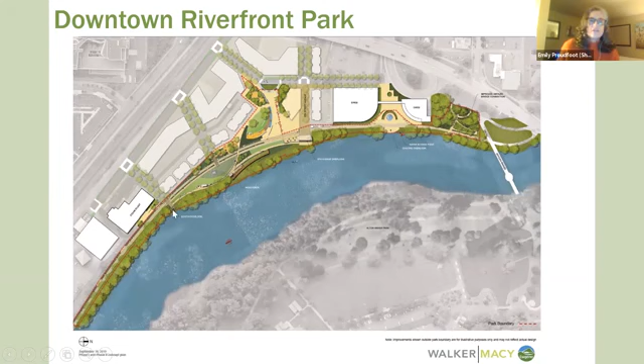A little bit of history about the downtown riverfront: the park and riverfront redevelopment has been envisioned for decades in many downtown plans and iterations of visions for a future of downtown where we come back to the river. It was the site of a former EWEB operations.

EWEB's operations moved west to the Roosevelt Operations Center around 2010. At that time, a master plan was developed for this site that envisioned a park and mixed use development, including retail and restaurants and lots of green space.

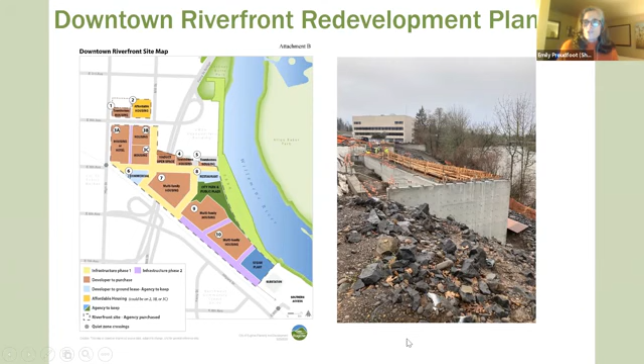In 2019, early 2019, all of the buildings were razed off the site. Then we embarked upon a huge earth moving project in which we moved the top of the bank back, relocated utilities, and graded the site so it would be ready for roads and utilities.

In 2021, over the summer, we almost completed the project. This is a picture probably in the fall, before we seeded this lawn area and before we'd had a chance to fully plant the riverbank.

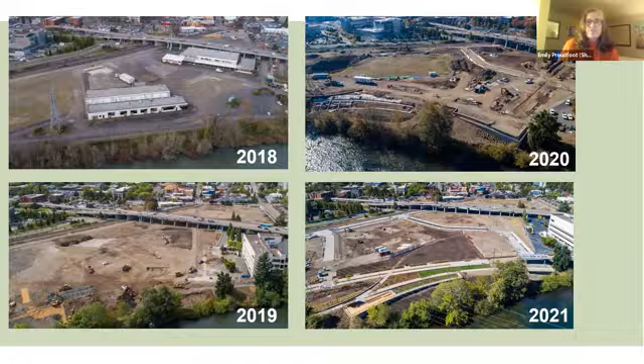But now there's a lot more green on the site, but you can see this deck overlook here, the 5th Avenue overlook, and it's really starting to take shape. It's a very quick progression over a relatively short period of time, and an extraordinary amount of work, because we were actually planning for a park on the riverfront by 2021 in time for the World Games. So a pandemic is never a good thing, but a year-long delay of a project like this can be very helpful. So with that, we are very close to realizing this vision.

We had some ideas about that from the master plan, which was that we want the river to meet the city and the city to meet the river. So lots of vegetation and stormwater, but fundamentally folks wanted an urban riverfront park. They didn't want it so urban that it was like marble and trees in front of glass buildings, but they also didn't want it so fuzzy that it looked like a lot of our other riverfront parks in town that are predominantly green and natural and shady. They really wanted this to have more of an urban feel, with the city coming toward the river a little more, while also enhancing the habitat and quality of life on the river for birds and fish. So there's a lot of these conservation ethics that were also expressed throughout the design process.

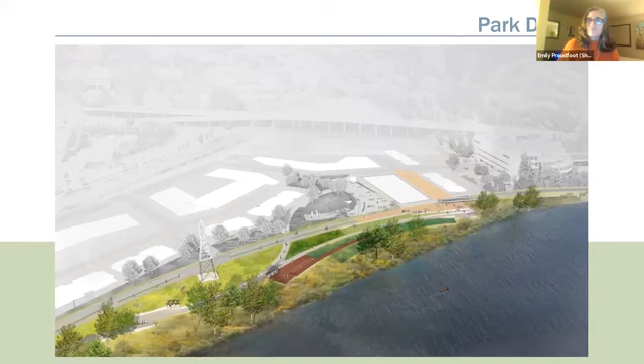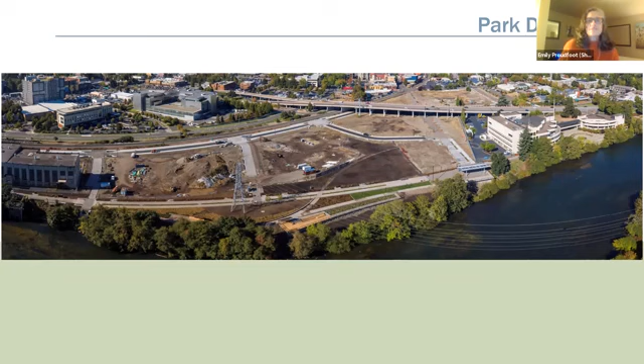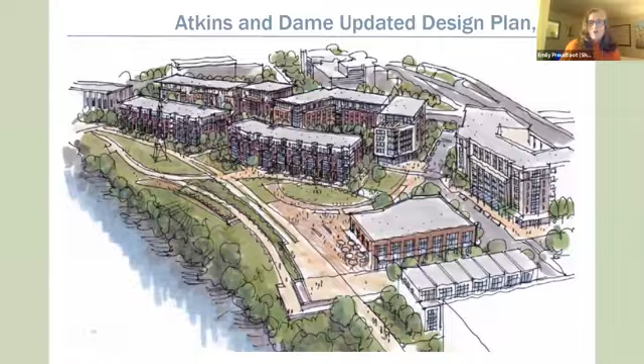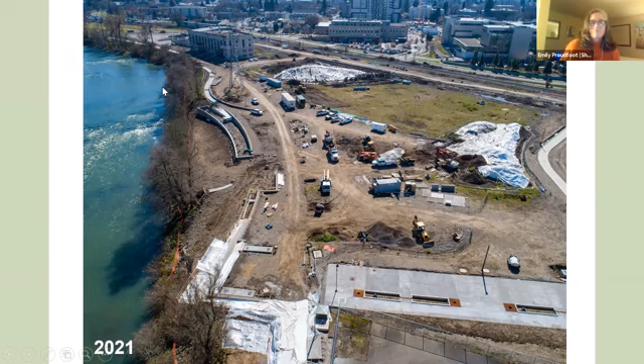One of the key design tenets within both the master plan and subsequently the park plan was this idea of a cultural landscape. A cultural landscape basically lets you know where you are in a place because it tells stories about its history. It creates experiences that are either historic or real or current, and they do that through plantings, art, design, and storytelling. That was really a vision from the beginning for this site, as there's been a lot of history on the Downtown Riverfront site.

So we have three different art installations that are going to be integrated into the site. The first is this steam ring here, and it interprets the steam plant, meant to be a cut-through of a turbine. The way the steam plant worked is it pulled water up out of the river, and then they boiled it using a variety of different fuels, everything from hog fuel or sawdust from our timber industry to, I think in the end, natural gas. That created steam to heat downtown. The steam plant was also a backup power generation site in case something went wrong with our regular power generation sources.

And so this artwork is really interesting. The outside ring is a grate, and the inside ring has all the parts and pieces of the steam plant labeled. The outside ring has a little bathtub under it, and inside of there is light and mist that will come out of the grate.

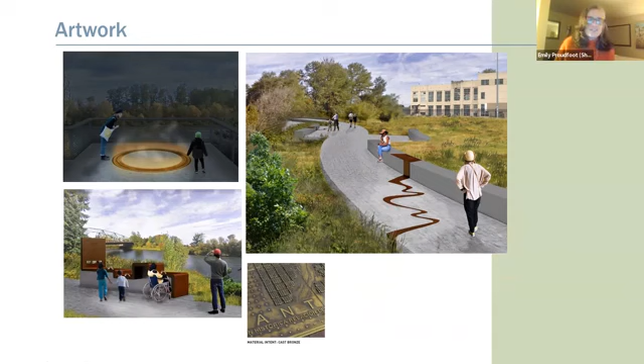In the meantime, we're finishing up a lot of tiny details that I think will make it really successful once it opens. Here are some samples of the bronze artwork—you can see this grate and these words on the inside. These are samples of the interpretive panels that come up off of the river piece.

The sort of iconic piece of art on this site—we had a lot of conversations with the community about artwork, and our project artist, who was on the design team, taught people about public art and then asked what kind of art they'd like to see on their Downtown Riverfront Park. One was iconic, really big art, and the other was interpretive art. I think we've covered a lot of those bases.

This piece is called Sub Supra, made of about 60 fabricated metal ribbons. The underside is stainless steel, and it takes the shape of the topography of the river immediately below it, so you can see the river channel here. It's very reflective, like the bean in Chicago—you can see yourself reflected in it, and it's bendy, so you can be short or tall. But I think one of the most beautiful things is that you can see the reflection of the river running along this edge when you visit the site.

So it's this beautiful gateway out to this wonderful overlook to the river, which is very expansive. It will be lit, and it's also meant to be a space for more artistic encounters—maybe sculpture, or a band playing, or a screen pulled down for visual art. It's really an icon of the place we've created here, and it's absolutely beautiful.

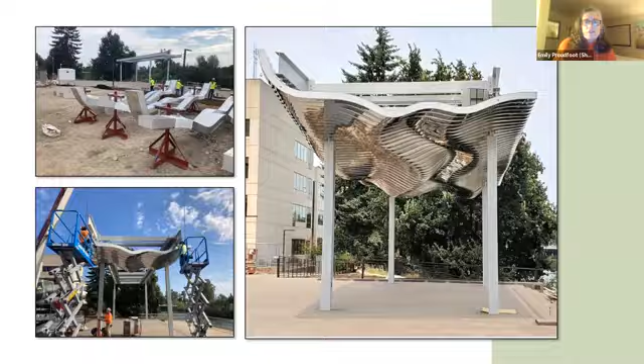This third piece is a temporary piece, and I love this piece. We have so much chain link fence on site that we wanted to put out the option for decorating the fence in some way. So we did a call to artists, and the successful artist was Charlie Swing from Art City, who reached out to communities of color and culture to see if they wanted to do some kind of culture raising on the fence.

The only group she heard from was a local indigenous group, this girl TJ, who's 17. She took photographs of an elder and a younger person and put them together as a single face across 100 feet of fence—these oversized faces of local Native Americans. It feels like they're keeping the park safe, looking over the river, and it's wonderful to have that cultural presence within our park setting, to have these folks seen within an art setting. It's a beautiful piece, and I'm very excited to open it with the park.

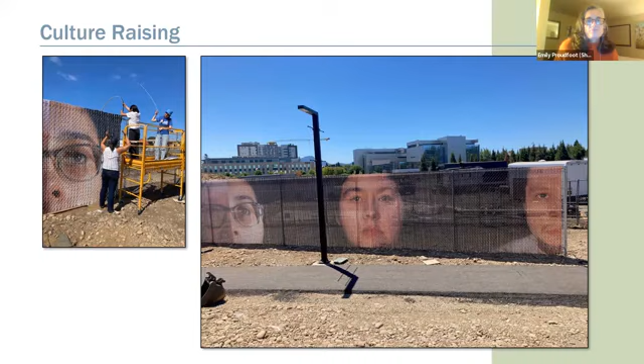We approached planting for this site in two general phases. In the first phase, when we moved all this dirt around, we also did significant habitat enhancement along the riverbanks that weren't going to be changed in grade. We removed a ton of non-native invasives—blackberries, non-native shrubs and trees, ivy, and all kinds of bad things. We grubbed those out mostly by hand, with a little spot spraying that was successful, plus some follow-up spot spraying.

Then, two years ago now, we planted over 24,000 native plants along the bank. I wanted to show you this drawing because it shows how these were planted—as tiny little plugs or pots or bulbs or one gallon plants, all native species.

One of the wonderful things that happened was that there were a lot of flowers in there. The very first spring we had columbine, lupine, bleeding heart, fresh new ferns, and all kinds of things—you can see the list here. In general, it's been really successful, I think.

The last thing I wanted to mention is that this line here is the 25-year flood line, so it's fairly high up the bank. In general, we had one planting group with lots of Nootka rose clusters planted within it—that planting group is this one. And then we had a second type of planting up here, the little dots—that was this one.

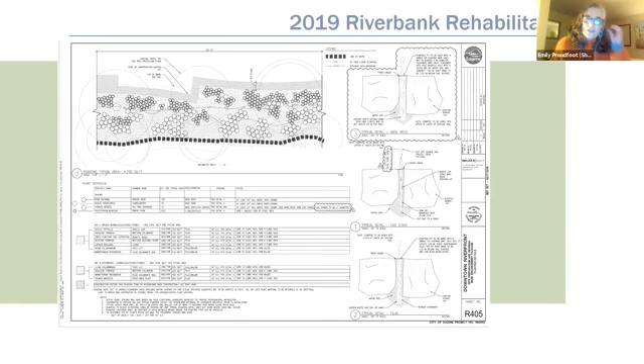So this is a drawing of the future deck and boardwalk and the stormwater treatment planting regimes.

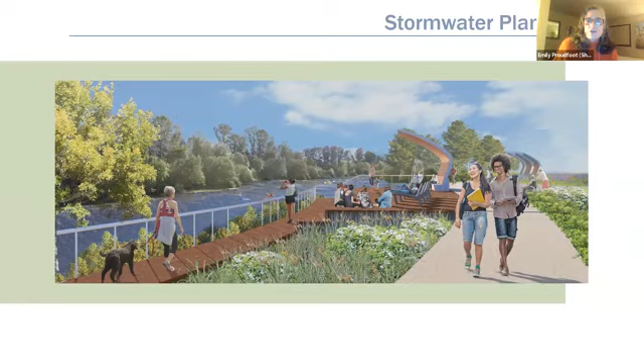As you know, in much of Eugene's development code, any paved areas have stormwater running off that has to be treated through some sort of vegetative facility before it can leave the site. So we have two main areas of stormwater treatment: one is along the bike path where we split pedestrians from bicyclists, and through the middle there's a series of stormwater treatment planters. Those collectively flow into this much larger one, along with drainage from other paved path areas.

This is an excellent example of a blending of plants to create a pattern, and it really has seasonal interest as well. This is a combination of rushes, then yellow twig dogwood, and then Siberian iris.

I think this was planted in late summer, so they were fairly freshly planted, but come springtime it's going to be more full. Over time you'll probably see less of the rocks and more really interesting, diverse vegetation, and in the spring you'll see beautiful flowers.

So it's very effective. This boardwalk runs along the edge of it, and the downhill side is the bank that goes down to the river, and it's been planted all in native plants as well. From a code perspective, for the most part, all of the plants on this site are native or some variant of a native plant.

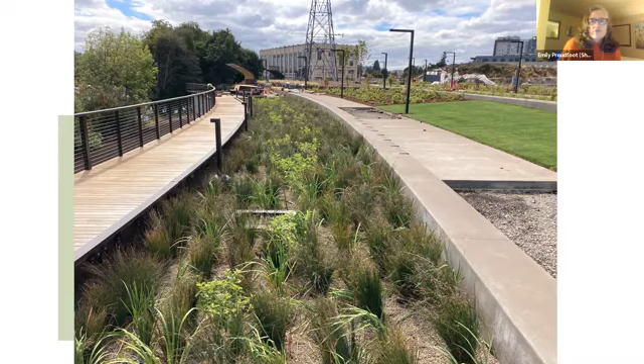So this is a view of what we call deck 2. It's not the main deck, it's a second deck to the south of the main deck. You can really start to see that sort of paintbrush aesthetic that goes through here.

If you look on the plan, this is all Deschampsia, some sort of variety like golden something, I can't remember, but it's very fine and kind of misty. Then in these various bands throughout that planting, there are other plants that get mixed in, and some of them are hiding right now, and some are apparent.

So there's lupin in here, planted around most of these plants in certain areas. There's camas planted all around the back of this section of the planter. You're going to see these things come up seasonally, mostly blue flowers, and they're so pretty. I just can't wait to see this texture and color evolve through the seasons as the project grows into itself.

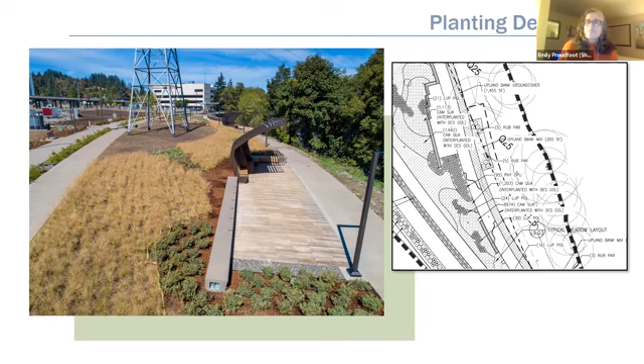This is a view looking south toward the steep planting, that same kind of approach. You can see these shrubs here, and this band marks some of these bands of plantings where they've interspersed other plants—a couple of different kinds of camas, some lupin, all interplanted with each other. When they come up, it'll be really apparent and seasonally interesting.

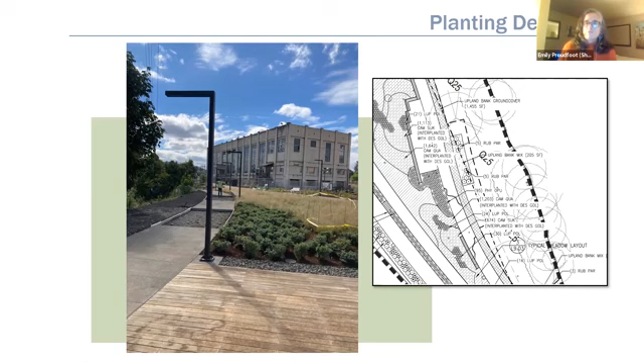This is planting up at the north end of the site. You can see Coburg Road right back here, where you drive up on 4th, and then there's that little on-ramp to the Ferry Street Bridge. This curvy path is all filled up with mixes of ground covers, also lupins, and then accentuated here with vine maple.

In the big picture, we saved some really big trees, big clusters of big leaf maples. These serve as a lovely understory within this new path and ramp system up to the top of the bank, and again it's all within the conservation zone, so these are all native plants or variations thereof.

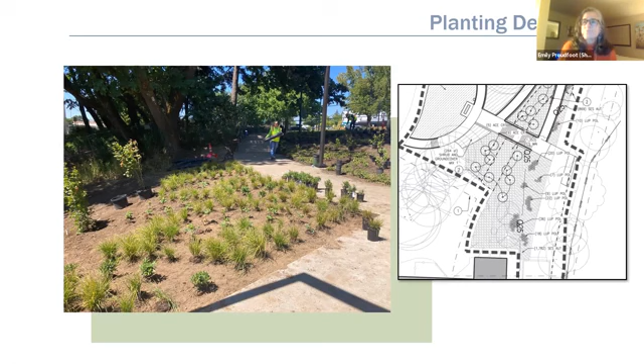So you can see this kind of painting—here's a very smooth grass texture, and here's this kind of rough texture that will have color popping out of it later. Here is the texture of these stormwater planters where there's clethra planted; there's just two things planted in there, a grass and this clethra shrub. Then here's that texture of the stormwater planter with the iris and the yellow twig dogwood.

And then we'll have a sort of fourth texture here, and there's a line that comes across also where there's a different texture of plants down here than up here. Those have all been planted now, they're just very tiny, so it doesn't make quite the strong statement yet that I think it will, but it's all irrigated and mulched, and I think we'll have every opportunity to thrive.

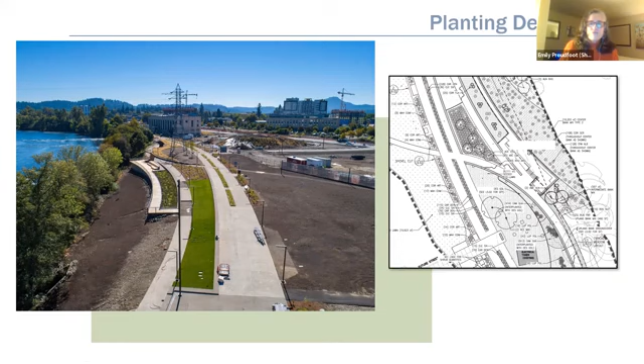So this is maybe a little bit more of the kind of color you might see in the future with these separated landscape areas. I love this drawing because it really shows this two-way bikeway and a pedestrian pathway that parallels the bikeway.

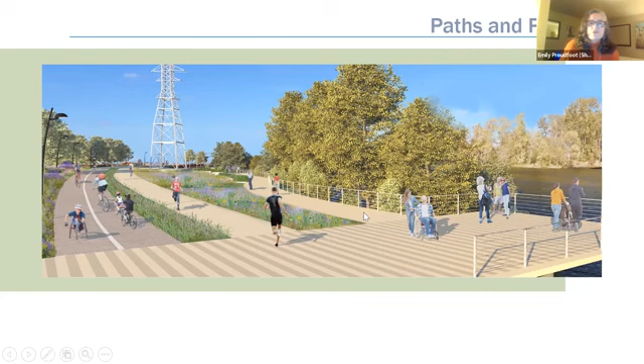And then there's this meandering river walk that takes you along in a much more slow fashion down along the river. One of the most impressive things about this design, once you get there you can really experience it, is that we've taken a bike path that was on top of the bank all the way over to EWEB, where you were squished between a fence and a guardrail and a very steep bank down.

In this project, we pulled that top of bank over here, and now we have this gracious acceptance of the river as it turns to the north. But when you're on site, there's this beautiful layering of experiences. So this is all one level, and then you can step down to this level with a beautiful pedestrian path and these overlooks.

And then with the deck and the boardwalk, there's this lower third level yet. So as you're standing down here, you can look back up these layers of landscape and the textures and shapes that are really accentuated, I think, by the planting design. It's a really beautiful space to be within and to appreciate the river, which is the entire point of the park.

From that perspective, I have all the kudos in the world for Walker Macy Landscape Architecture and their real vision around how this design could achieve so many goals and visions we had for this park.

Lastly, I really look forward to the development of the Downtown Riverfront Plaza. I think it will add more of that urban feel. We'll have a plaza that can be programmed in lots of different ways, more trees, and I think it will continue to have that kind of textured landscape that really defines space, but also showcases a design for one of the most beautiful natural assets in our whole city.

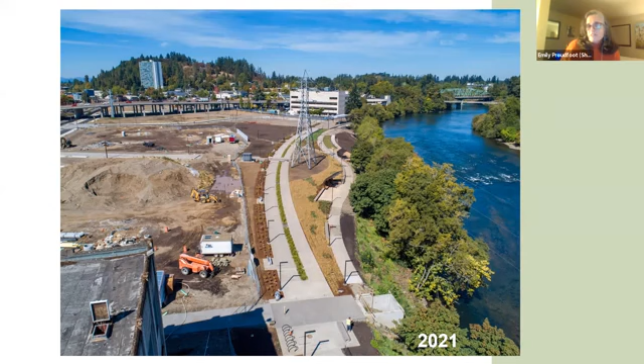So that's what I have, and I'll be happy to take questions.

Okay, thank you, Emily, that was a great talk. I can't wait until I get to run down through there. I know, it's very exciting.